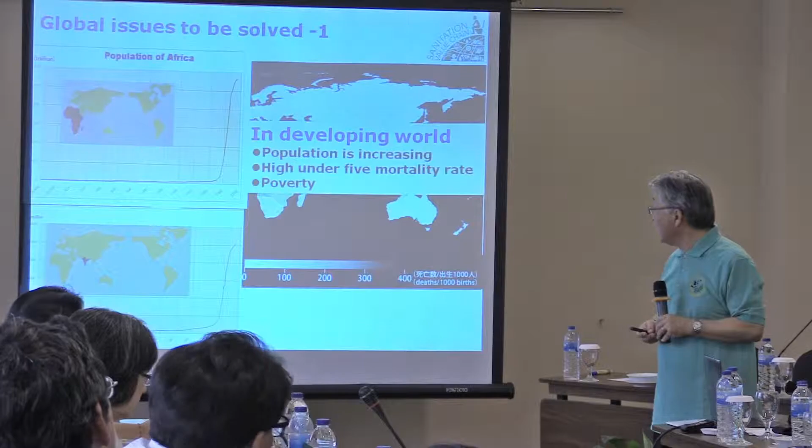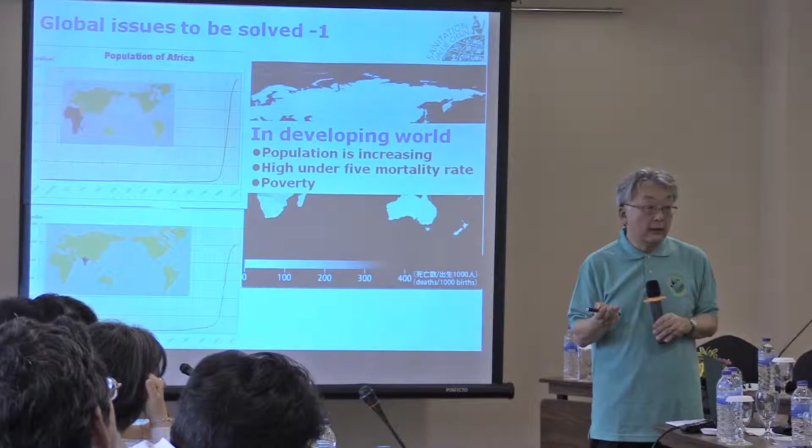So the first point, what project issues are we tackling? The first is sanitation. If we look all over the world, in white colored zones, there is a very low ratio of people who can use the sanitation system, and those places show a very high under-5 mortality rate. We think in Africa or some Asian regions, the population growth will continue, and in those places there are high under-5 mortality rates and poverty issues. So how can we contribute to accomplishing the Sustainable Development Goals, Target 6? This is our first target.

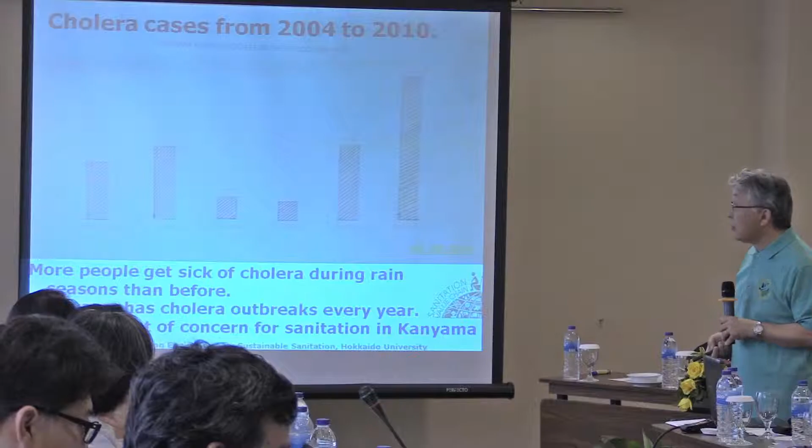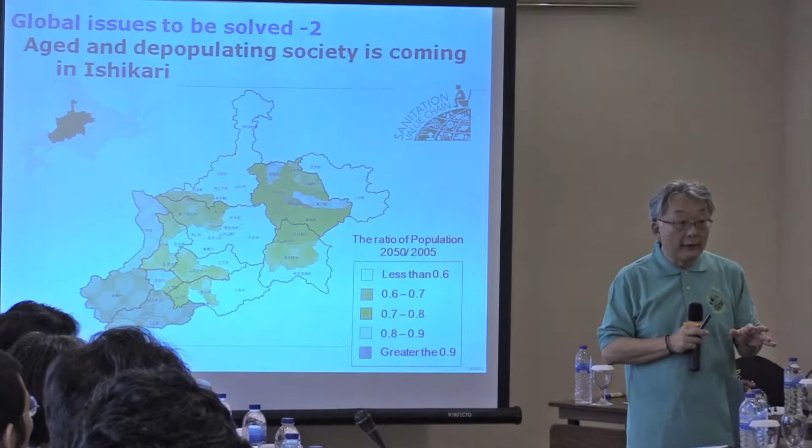That's our first goal. The second goal is the issues happening in Japan. Some of you may be surprised that there are aged and depopulated societies emerging in Japan. This white colored area, in our estimation, in say 20 or 30 years, their population will be half or less.

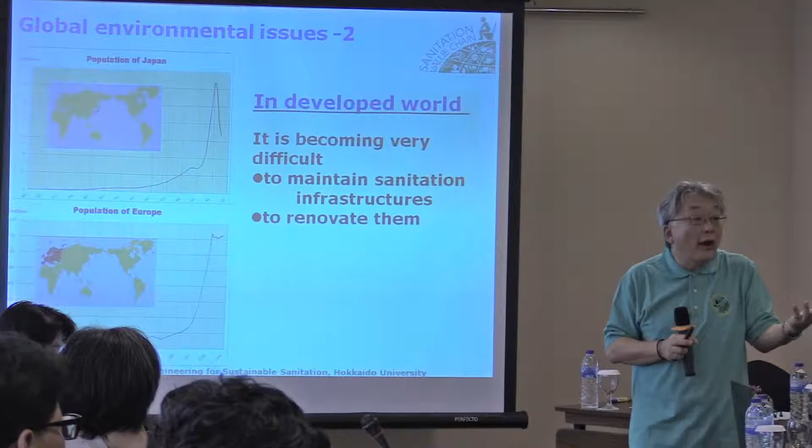If this is the case, we are very anxious about maintaining current sanitation infrastructures. Also, Japan invested lots of money into our water system, say 30 or 40 years ago, and now we need to rehabilitate those systems. But we don't have enough capability, economically or otherwise. So this is our second goal.

What I mean is, we will face, and you will face too, in 100 years or maybe not that long, I don't know, but population will decrease. I hope it stabilizes at some level, but in a depopulating society, what kind of water system should we have? That is our second target of the project.

To do this, we'd like to propose the sanitation value chain. This is the common solution for the developing and developed world, and we'd like to show the validity of this concept.

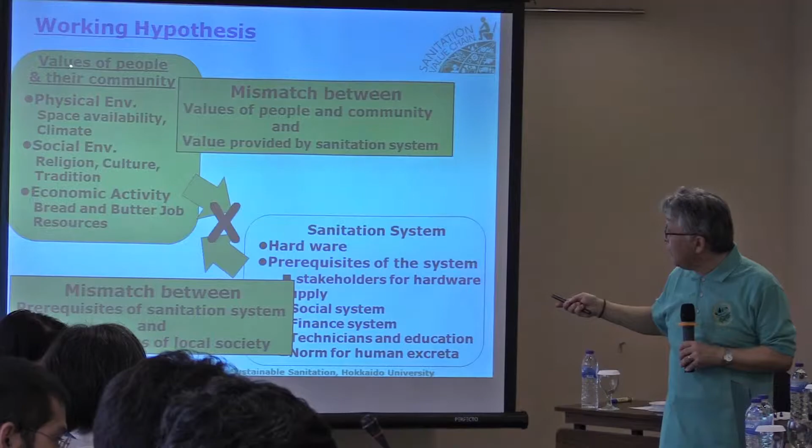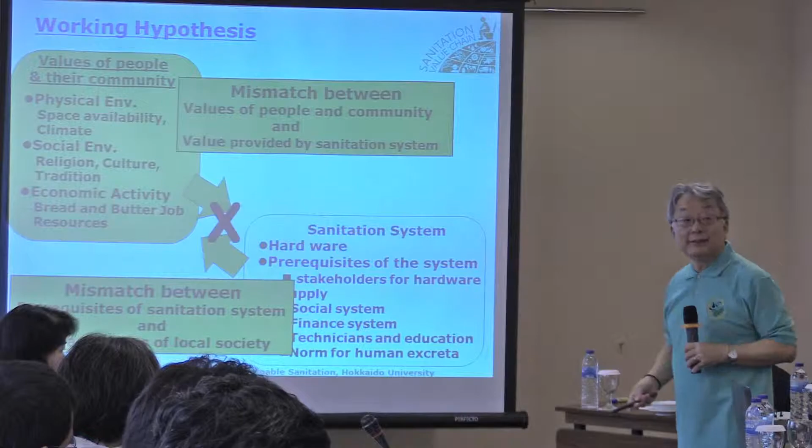So our working hypothesis is very simple. The first hypothesis is about the values of people. You have your own values based on your religion, culture, and history. We Japanese also have our own values. We think there is a mismatch with the value given by the sanitation system. The sanitation system gives us some value, but this value and our values, or your values, are not matched. That's our first hypothesis.

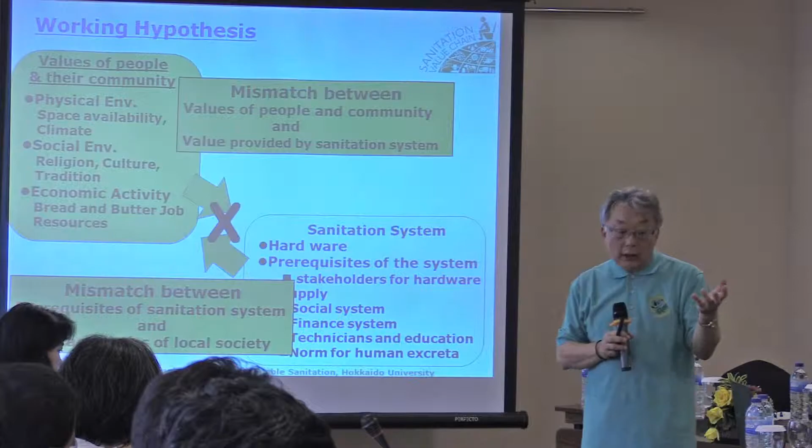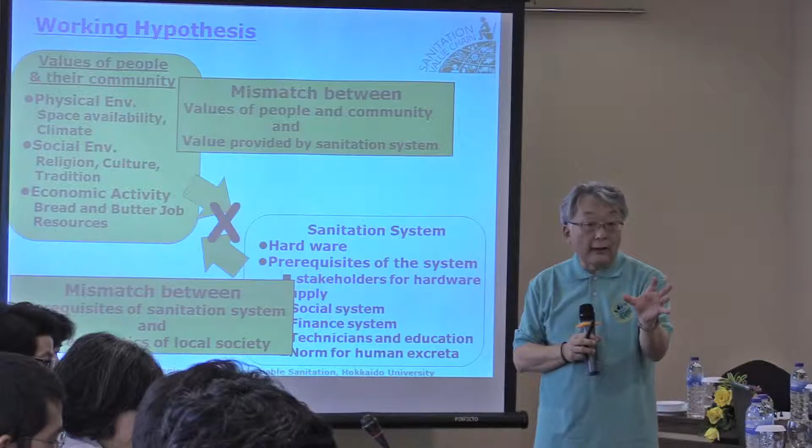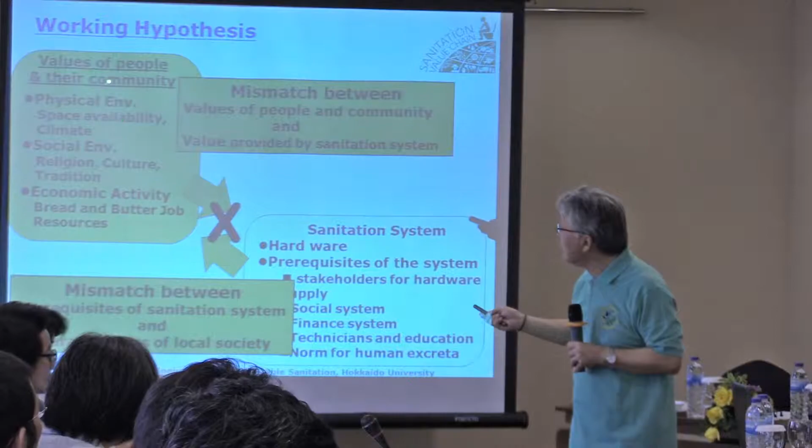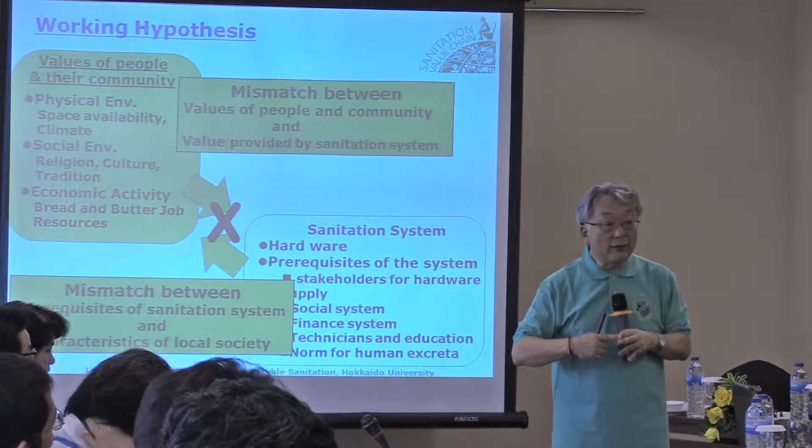The second point is the mismatch when we install the toilet system, as in Japan. I'll tell you later - the toilet bowl itself will not work. To operate the sanitation system, we need many supporting systems. We call this the prerequisite of the sanitation system. So the prerequisite of the sanitation system and the conditions of the community should be matched, but currently there is a mismatch. Therefore, we are proposing the sanitation value chain.

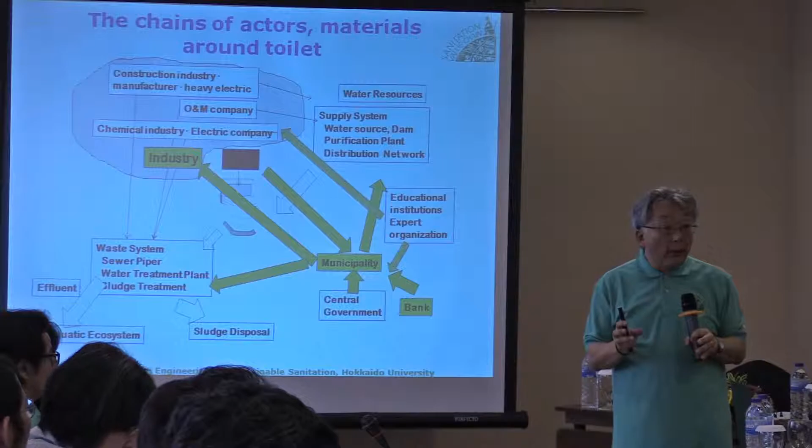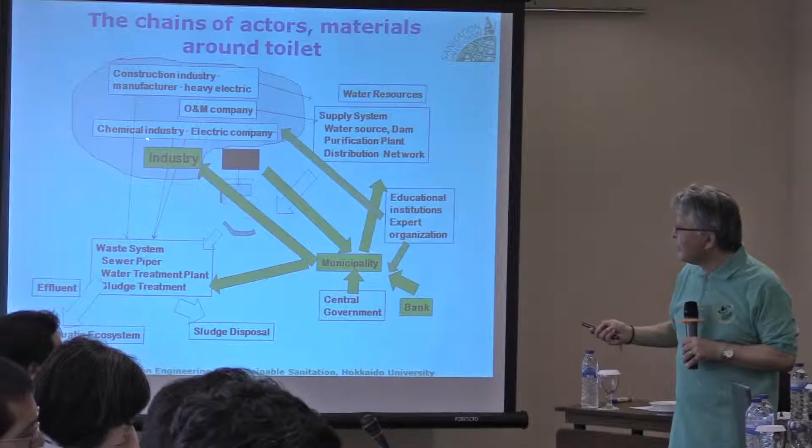Okay, why value chain? The point is very simple - it's a chain of the materials around the toilet, as in Japan. To operate the toilet, we need water resources, a water supply system, a wastewater system, and to operate and maintain the system, we need construction industries, manufacturers, heavy electric companies, operation and maintenance companies, chemical supply, electricity supply - everything.

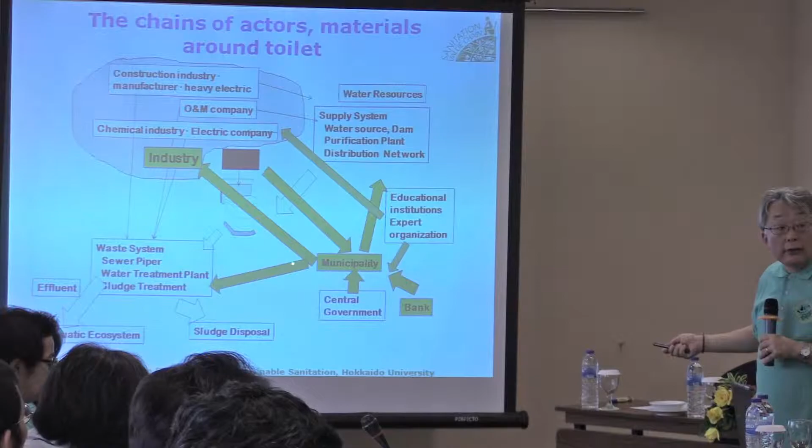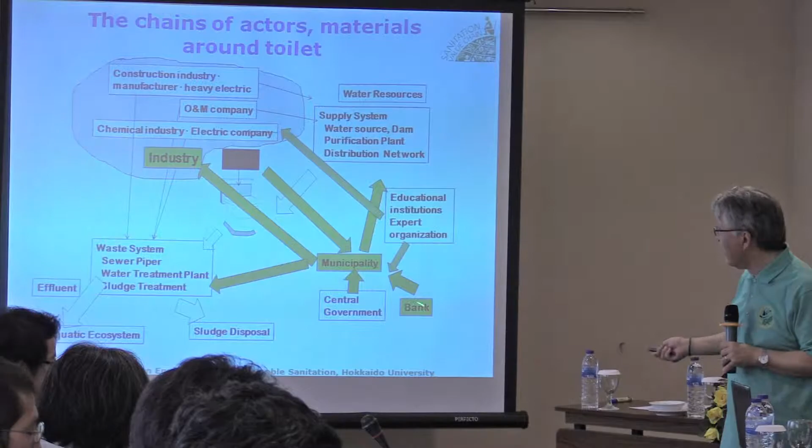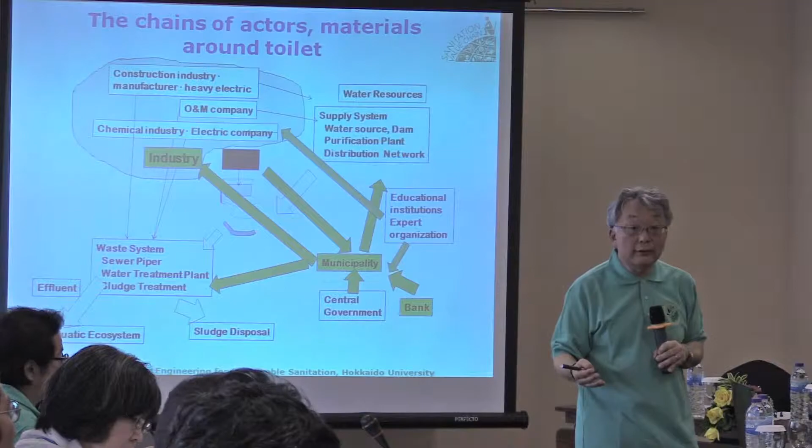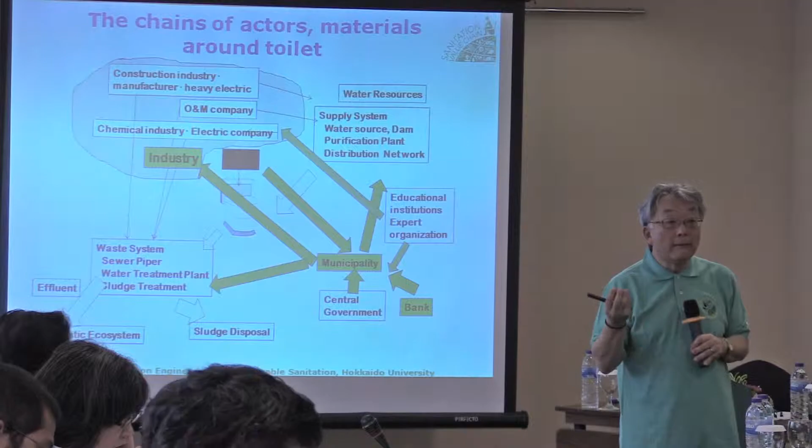This yellow color shows the flow of money. Municipalities have to prepare some amount of money to operate and maintain the system, but that's an issue currently happening in Japan. Also, municipalities have to make a loan from the bank, but when we talk about these issues in the developing world, especially in West Africa, they don't have any credit - they cannot make a loan from the bank. So the money flows, and another part is human resources. Everything together makes up the sanitation system. Therefore, we think the value chain is essential.

Second point: why the value chain of the current model for the water sanitation system will not work in the future. Simply because business management of the water agencies, water tariff from users cannot cover the operation and maintenance cost. Only 50% of the money comes from tariffs from the people. The rest is covered by local government through tax, imbalance we cannot continue.

Also, rehabilitation of the pipe network and treatment facilities requires large amounts of cost in the near future. Unfortunately, I have to frankly tell you, we don't have money in Japan to rehabilitate the water and sanitation system right now. Therefore, we do need a new system.

If you receive this information, I think you are lucky, because you'll be able to design a new system and install it right now, using the most modern, state-of-the-art technologies. So we would like to develop these systems based on the value chain.

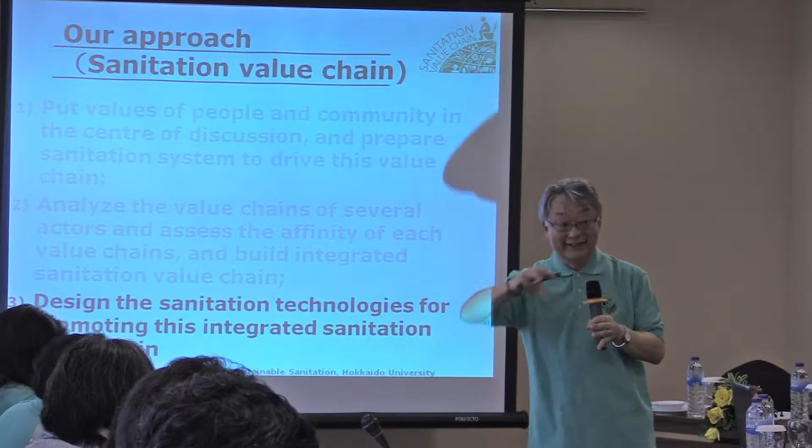We analyze the value chain of several actors and assess the affinity of each value chain. I mean, you have your own values, other people have their own values, but we need to make a very good structure and linkage.

And the last part, we'd like to design new technologies for promoting this integrated sanitation value chain. Okay, so maybe I'll skip this one. Our project has three topics.

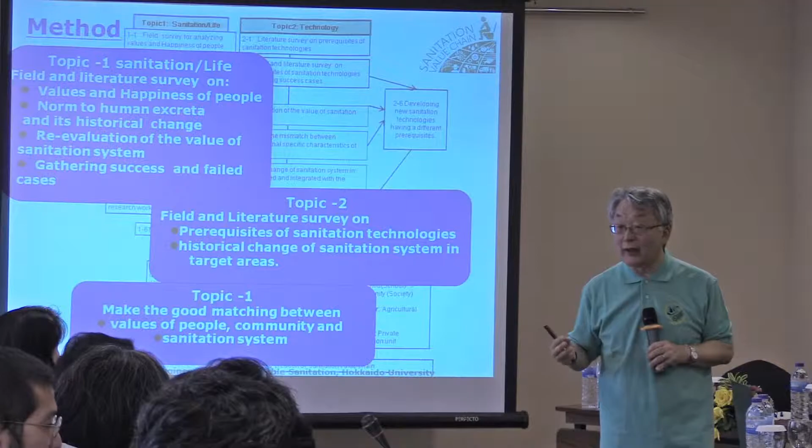First one is sanitation and life, where Professor Yamauchi is working, as group leader for that field topic. Topic 2 is the technology part. Unfortunately, today Dr. Ito is in Paris, France, attending an international conference. Dr. Ito is working on topic 2.

Topic 3 is co-creation of the sanitation value chain. This is led by Dr. Ushijima, who is the group leader of topic 3.

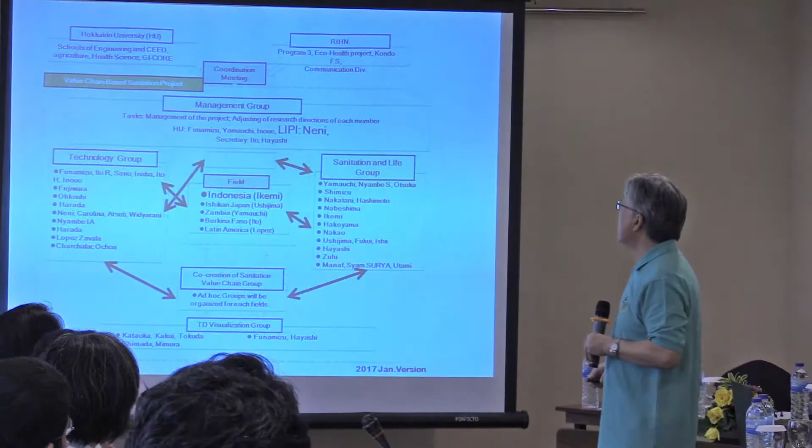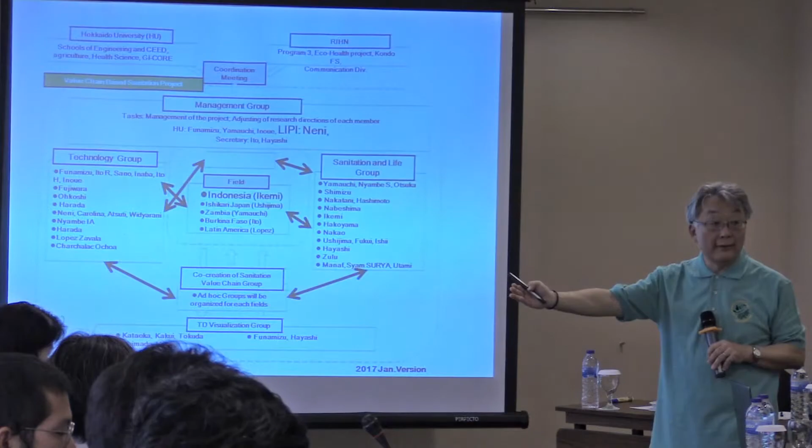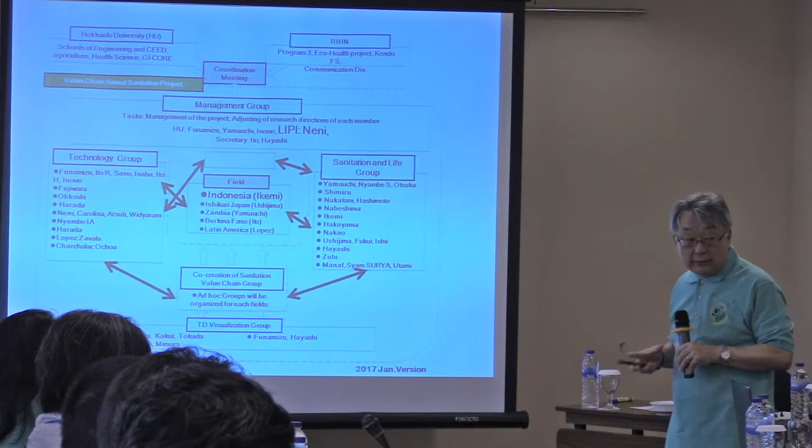So this is my final presentation. We have this research structure, and in the management group we are very happy to have Neni as a management committee member, and in the field, Indonesia is led by Dr. Ikemi, the group leader of the Indonesia field study.

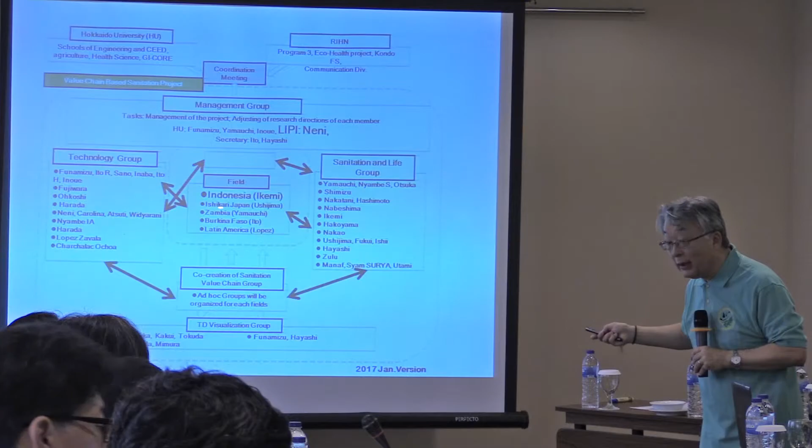Indonesia is one of the very important fields for us, so I'm very, very much looking forward to working with you. Thank you, thank you very much.